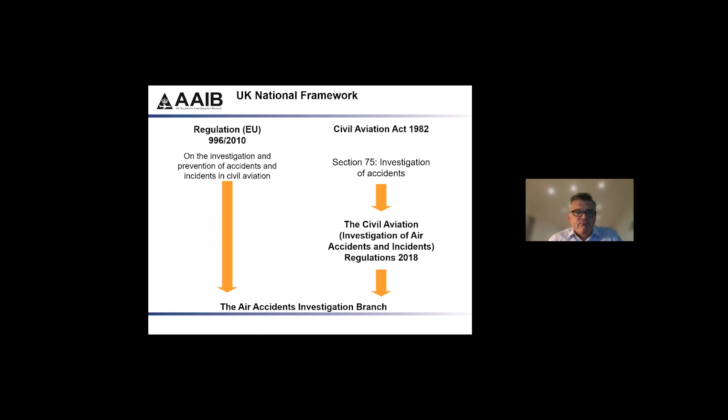Sometime in the future, we may well organise, if you want to come and look around the hangar, you'd be most welcome. But obviously during lockdown, it's all a bit tricky at the moment, but we can talk about that offline. But this is on the outside of Farnborough Airport.

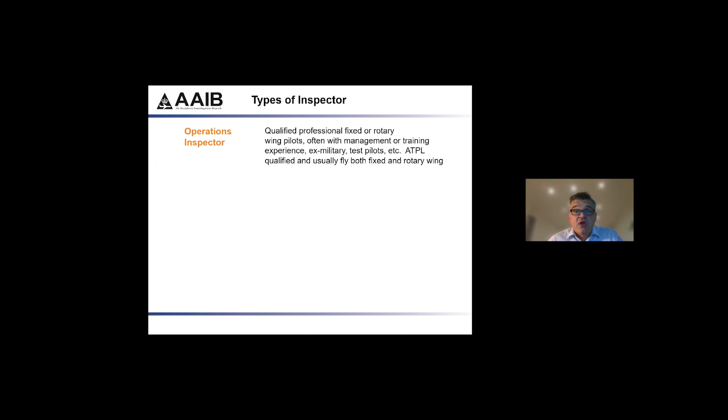Who are we? Well, we've got 4 types of inspectors. We have operations inspectors who are basically pilots. They're all ATPL qualified. Many of them ex-military, but increasingly that's less so now. A good mix of people who fly both fixed wing and rotary wing, and most of them actually fly both. And we actually keep their currency up. So most of our pilots are flying 1-2 days a month for an airline or in the North Sea.

We've got engineering inspectors. That's me. Mostly civil, but a few increasingly coming from the military. All experienced in the aerospace industry. We differ from some countries. We don't take graduates. All our people have typically got 10+ years before they come to the branch. And we also encourage engineering inspectors to undertake and get a private pilot's license.

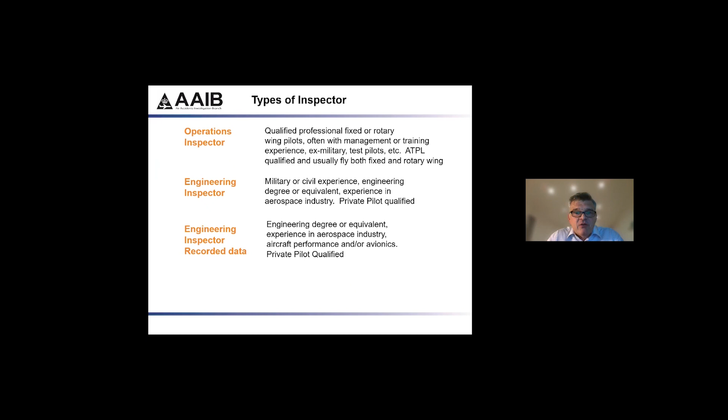We have engineering inspectors who specialise in recorded data. These are our sort of heavy duty techie people, and that's the growth area for us at the moment. Again, very heavy on their avionics and background in data and non-volatile memory. Again, private pilot qualified. And we have currently 1 human factors inspector. We have lots of links into other places for human factors type skills, but psychology, lots of research type background, and specialities like ergonomics in our armoury.

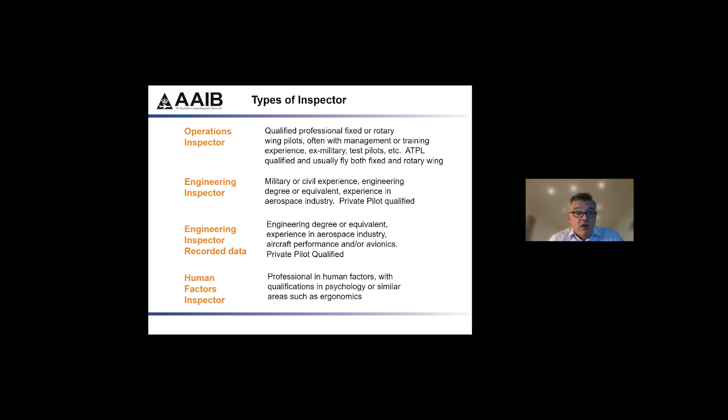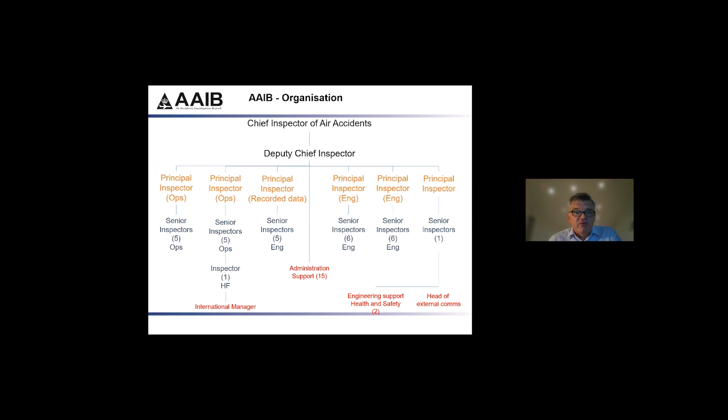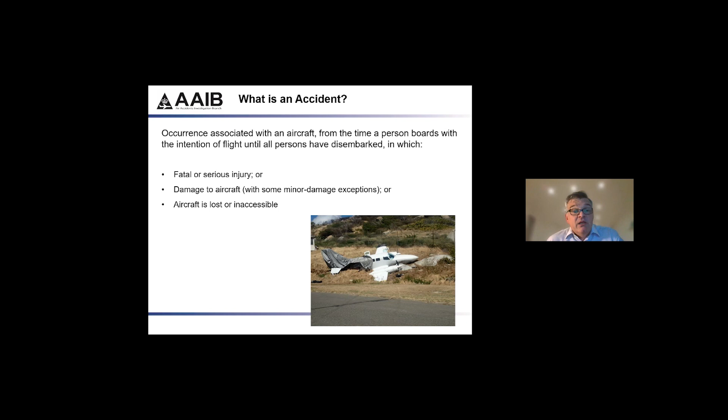There's an intention to fly, and thereafter, you need to have a fatal or a serious injury, some significant damage to the aircraft, so tyres, brakes, propellers don't really count, or the aircraft is lost or inaccessible, which in the case of MH370, for example, which I was heavily involved with a few years ago, the Malaysia Airlines 777, if you haven't found it, that is clearly an accident by Annex 13 ICAO definitions.

We didn't used to, until about the 90s, investigate serious incidents, and actually, fair play to ICAO and the EU, there's an awful lot of safety we have from things that might have been an accident but weren't quite. We very rarely do those for GA aircraft, but for where our main focus is, which is the fare-paying passenger, we're probably doing as many serious incidents as we are accidents in terms of where we can learn some serious lessons, and I'll come back to some current things we're doing on that a bit later.

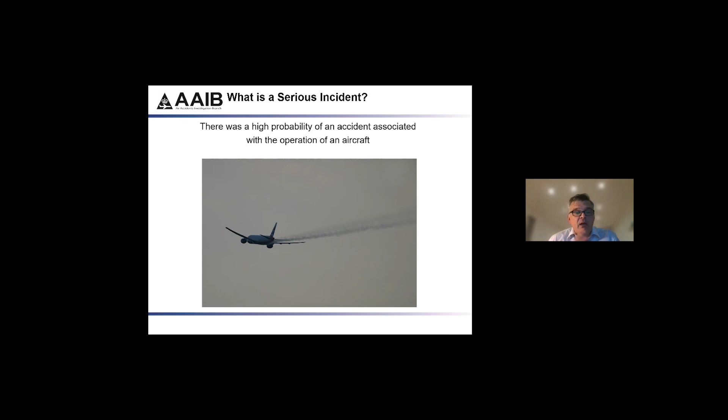So in a typical year, the phone rings about 1,000 times. We deal with a lot of those with no further action, very minor things, and people are just trying to be helpful. And we'd rather people phone us than not phone us. We really like to try and capture as much as possible.

But about 200 times a year, we will deal with a correspondence investigation. That is generally a GA pilot has an accident by the definitions of ICAO, and we will send them a form. We'll do it by correspondence. We call it an AARF, an Aircraft Accident Report Form, and we'll write maybe half a page, maybe 3 pages, and we'll publish those once a month in our bulletin, which is online and still a paper copy and sent to flying clubs around the UK.

About 30 times a year, we will deploy. We'll send 2, 3, 4 plus people to a field. It might be a GA accident, GA fatal accident. That'll be a field deployment. Or if there's a serious incident or an accident to a passenger aircraft, we will deploy a team, and that's a much more significant investigation. It might take 9 months to complete, and again, we'll report that in our monthly bulletin, available online, and with recommendations, etc.

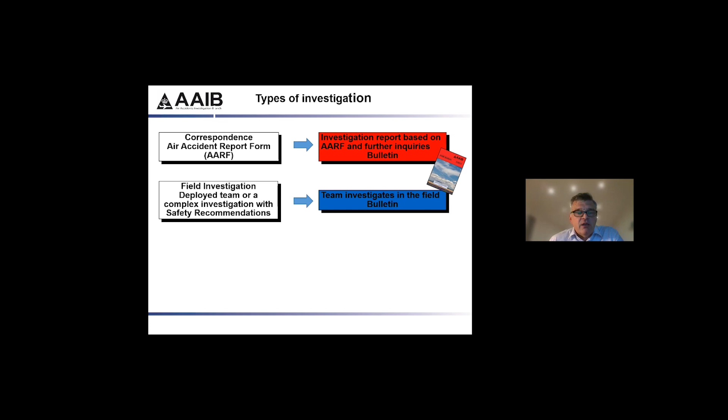Perhaps once, twice, 3 times a year, big investigations, a formal investigation, standalone report, a yellow report. We make those reports available. They take a bit longer, and occasionally as well, if we have an urgent need to do something quickly, like we're deployed somewhere, we want to make a recommendation very urgently, we haven't finished the investigation, we'll use a 2 or 3 page special bulletin to make a recommendation. And again, I mentioned earlier, our currency is recommendations. We make recommendations to improve safety.

In keeping with Annex 13, all our field investigations and our formal reports are sent out for consultation. So anyone, the pilot, next of kin of the pilot if they're sadly deceased, the owner, CAA, EASA, will have an opportunity to comment on the factual content of the report, and that's how we get feedback, make sure we've got all our ducks in a row. That's a confidential draft report, before we come back, submit all the comments, and then publish it in the public domain. So it's very tight secrecy and scrutiny up until that point, and then it's in the public domain, and we try and be very, very open about the safety message.

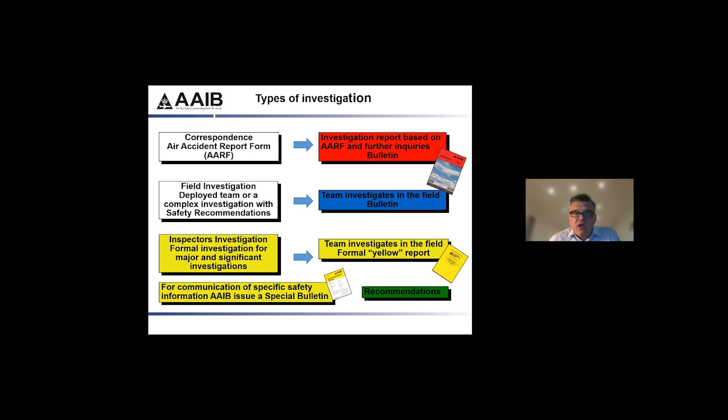Interestingly, both Bermuda and the Cayman Islands have a very significant fleet of aircraft on the registration, typically 600 or 700 aircraft, and very little general aviation. So a lot of the Russian low-cost airlines are registered in Bermuda, and if there's an accident, by virtue of the fact that they are a Bermudan reg, we occasionally, once every couple of years, find ourselves going to a major accident in Russia to support that part of the investigation as part of an international Annex 13 investigation, which has always worked very well, although it can get a bit cold.

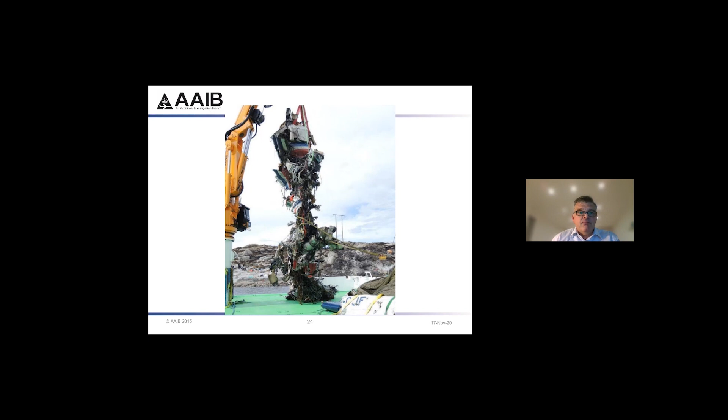Fortunately, the tide in Norway is only about half a metre, so we had a pretty good recovery operation of the bits we wanted, and we knew where they all were. The main rotor head, a bit like a sycamore or a child's toy, just drifted down onto land, pretty much intact. A similar operation, but a lot swifter and cheaper in Norway to recover the wreckage.

Now, this is going to be the difficult bit, so bear with me. There's two engines on this helicopter, both going at about 22,000 revs per minute. It goes through a bevel gear here to change direction. And then there's the bit missing here, and that's the clue: an epicyclic gearbox, which reduces the revs per minute from about 22,000 to about 265 for the main rotor head, and increases the torque.

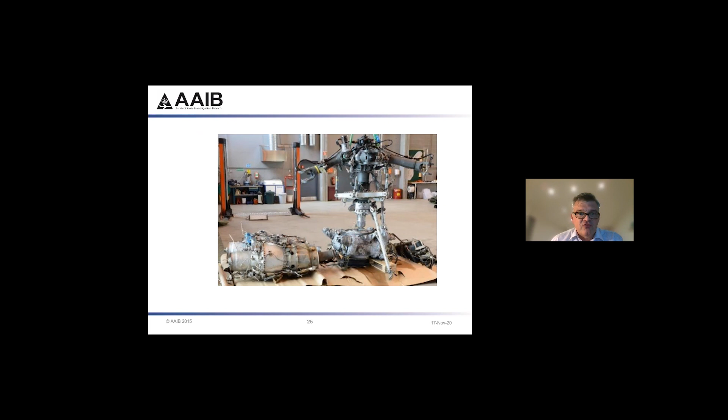The fact it's all missing is a big clue here when we reconstructed it in a hangar in Norway. If we look from below this point here, this is what an epicyclic, or sun and planet, gearbox looks like.

It's got two stages on top of each other. It's like a very big Sturmey Archer bicycle gearbox, if you've ever taken one of those to pieces. And basically, it's got a sun gear, which isn't here at the moment, meshing on, in this case, 8 planet gears, and those also mesh on an outer ring gear, an absolute work of art.

One of the most important parts of the helicopter is the gearbox. This is a particularly clever, beautiful design, very light for what it's doing, and very compact. Each of these gear wheels here looks like this, and each of these gear wheels clearly needs to have a bearing in the middle. And you can see these sort of shiny objects here about the size of my thumbnail.

There are 28 roller bearings inside each of these gear wheels, and they roll on an inner race in the middle and an outer race. They roll on the inside on what is actually almost a spherical, inside of sphere surface inside this cylindrical gear. And this gear is about 7 inches, like a sort of small cake size gear wheel in high spec steel.

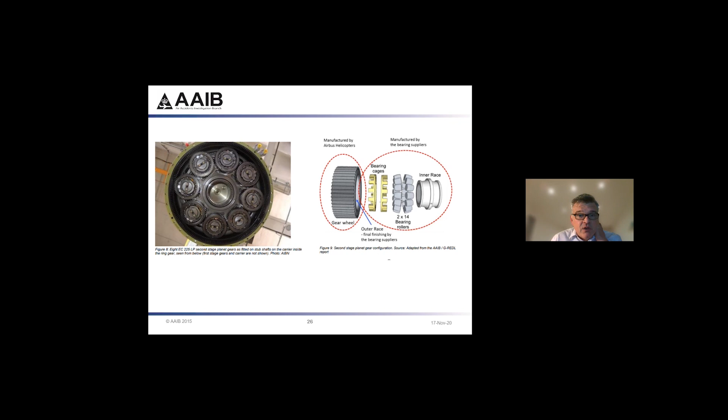Now, we knew from the first accident that this had failed due to fatigue, but we only had one half of it, which was the wrong half of it. We wanted the half of it which actually had the initiation of the fatigue, and we didn't have that. On this Norwegian investigation, if I show the next slide, we had the bit that had the initiation. So after all that wreckage recovery, we're talking of something that's basically smaller than my hand, and that's a quadrant of one of those gear wheels there.

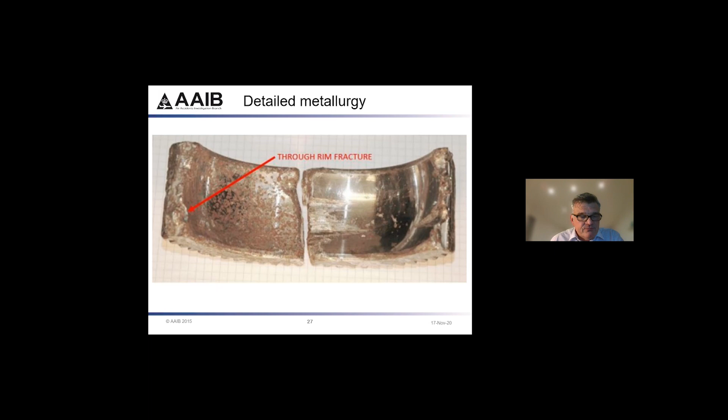And this bit here, this little peanut feature, and I'll show you in a minute, there's some little divots, little spalls coming our way here. And you can see here it's like a sort of spherical internal face, and those roller bearings roll along here and along here in 2 fairly well defined tracks on this smooth surface. If we look at this face here, that's what it looks like.

I spent a lot of time over at the other side of the runway at the labs at QinetiQ, working with the material scientists there. You've got this peanut feature here, which is the start of the failure when it goes through the metal. That's the gear tooth there. You can see the bottom of the gear tooth is here, and this whole fatigue is spread out, causing the whole gear tooth to fail.

Once that fails, the gear wheel opens up, it jams the gearbox, and there's so much energy involved. The support structure cannot support the jamming of the main rotor head. The main rotor head detaches, and that's the impact sequence. So what I'm going to look at here is what caused it to actually fail in the build-up to this, through fracture, through surface, through metal failure.

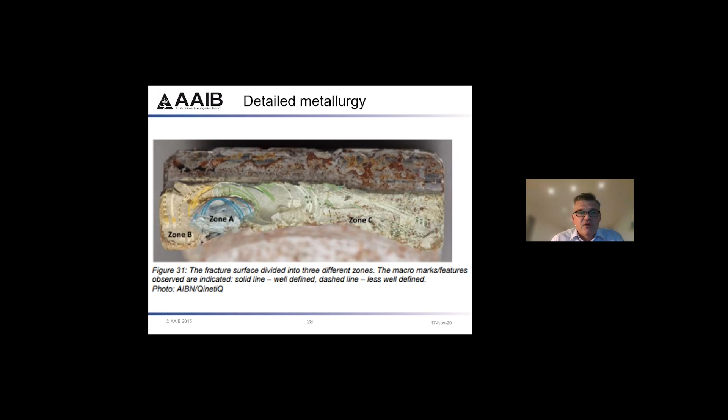And that's the peanut feature. That's the actual fatigue surface we looked at. And this is the line where the bearings actually roll. And this is what we found, with lots of cleaning up and very, very painstaking work to remove debris and corrosion from even just a few hours in the sea.

We find these little spalls, spall 1, spall 2, spall 3, they're 2 or 3 millimetre wide divots that have opened up and generated material. Now, normally with these sort of failures, you get material being generated like spalls, it's fairly natural. You detect it with a mag plug and it tells you something's wrong and you pull the gearbox. But in this case, they had 3 tiny little bits that didn't show up on a mag plug, might have even failed on that flight. And this is an enlarged version of it, you can see them here.

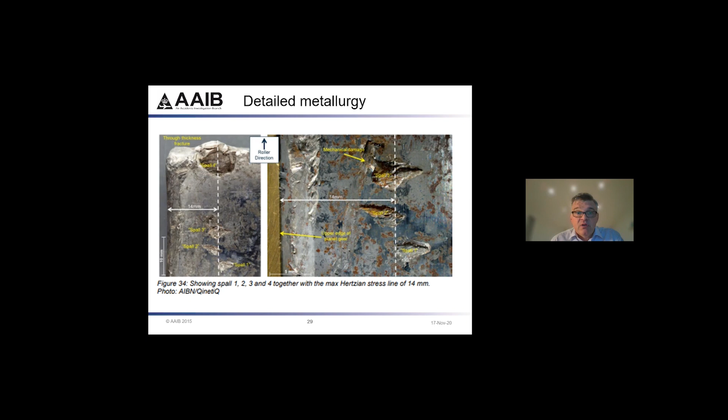And if I take a section through here, we then did some fantastic work with QinetiQ and Southampton University to do an X-ray. And that's that peanut feature I talked about. This is one of the spalls, the big spall, that's a little spall. And what we could see from here is all sorts of tiny cracks underneath the surface where the rolling contact fatigue was doing its stuff and causing the spalling. Lots of things were generating, but this hadn't actually pulled away yet. This bit had, but on this occasion, the fatigue went all the way through the surface and caused a failure.

So that was probably about a year's worth of metallurgy, several hundreds of thousands of pounds worth of work, lots of painstaking work in the lab, and the fleet of this helicopter was grounded in the North Sea for, I think it was about 9 months in the end. So a lot of pressure. We want our helicopters back.

A lot of legal work in the background. People saying, we want access to this. Our helicopters don't work. Lots of legal cases in the background. So the pressure was really on in that case, and that was very rewarding, very challenging, but also quite a testing investigation.

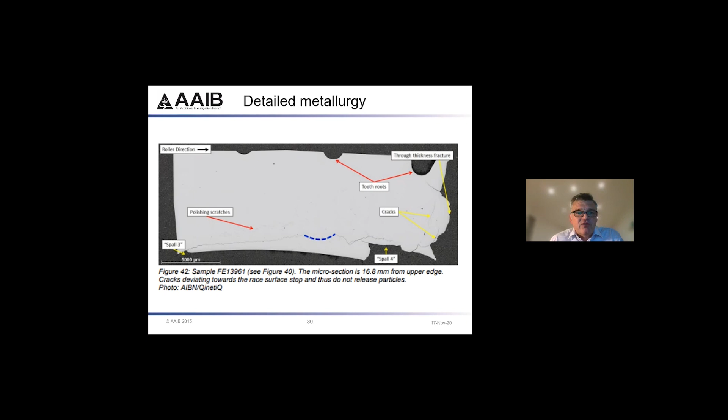I also was made aware very early on that England football were playing against Trinidad and Tobago in the World Cup in Germany that day, and there were about 4 or 5 aircraft desperate to take off full of England supporters. We want our airport back. No pressure there.

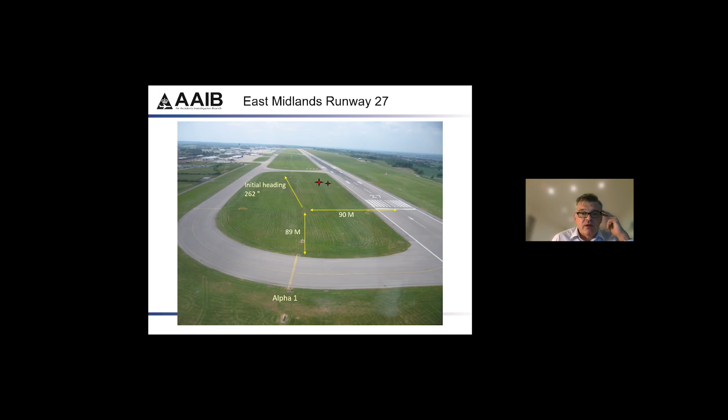And then as the morning evolved, we realised it had been very, very foggy overnight. This aircraft had been inbound to East Midlands, and as the fog was clearing at about the time I arrived at Birmingham, we got reports of a Ryanair flight about to take off, saying I can see a gear leg to the side of the runway in the sterile area. What's going on? And as it turned out, this 737 had actually tried to land at East Midlands, which is a massive freight terminal, in the early hours, and it had missed the centre line by about 90 metres.

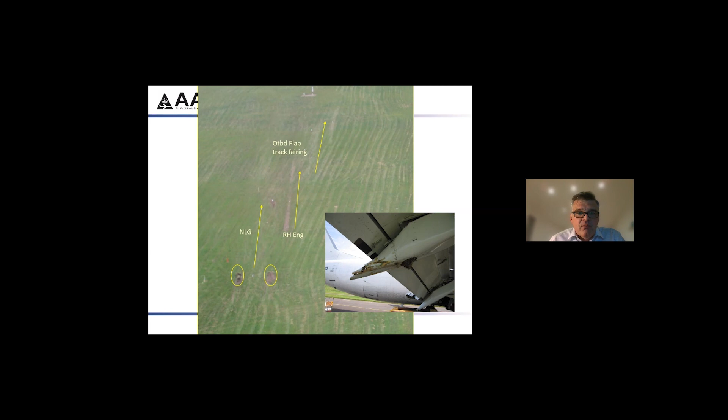Sorry, wrong way. And these are the ground marks. We've got these marks by the main gear, the nose gear, then the nacelle, the outboard flap track, which you can match up the marks here. So I was basically matching up my damage on the aircraft with the damage that my colleague was working on at East Midlands, and then the right wingtip.

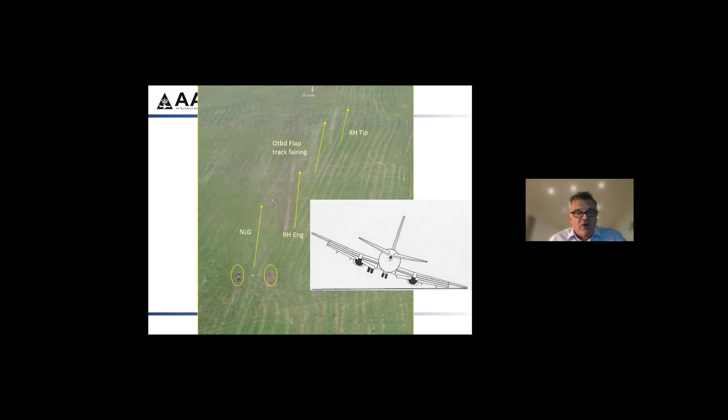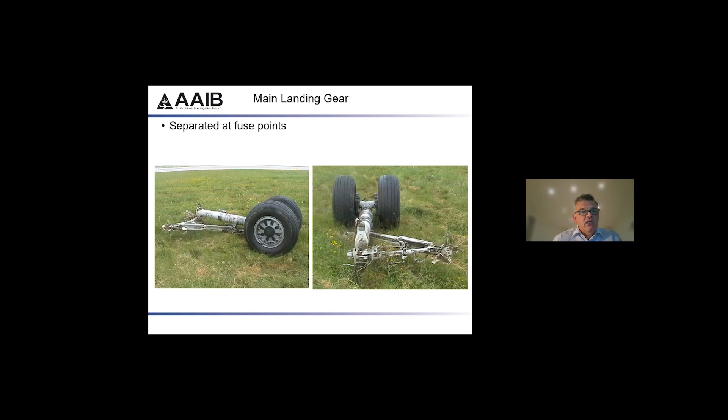So this is probably the closest we've come to a fixed wing commercial air transport accident in the time I've been there. Very lucky to be alive, very lucky not to cartwheel down the runway. And there's the right main gear leg assembly as found.

So what had happened? If I can boil down a lot of work from my pilot colleagues, this was very much a limitation of human performance, a human factors type investigation. Very late on in this Cat 3 approach in the fog, they received an inappropriate RT message just about company business. They didn't want to hear this. They were really concentrating hard.

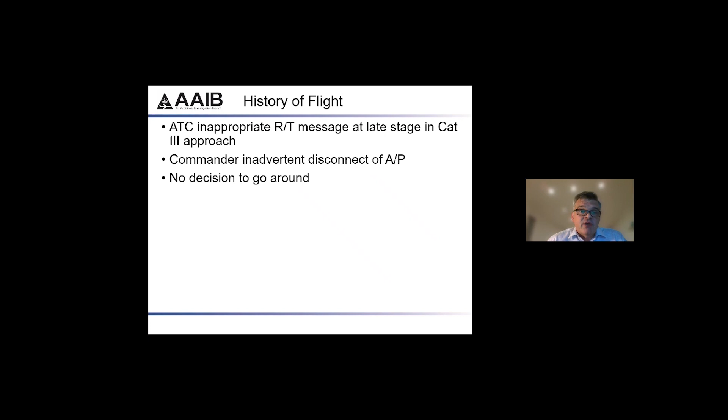They were working hard, and as a result of that message, the commander inadvertently disconnected the autopilot, and that's the real crux of this. They didn't decide to go around. They lost situational awareness, and we identified several issues for training, primarily around the lack of a go-around call, which was basically the main issue here.

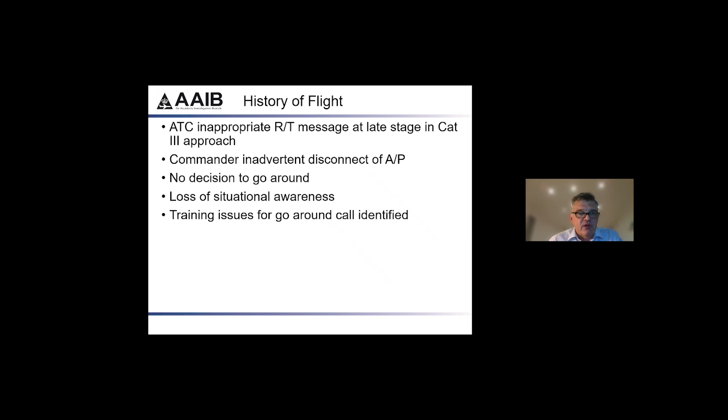Now, in this case, fair play to Boeing. They have a design philosophy of structural fuses, weak points where the landing gear attaches, so where there are excessive loads, well above any heavy landing loads, the gear will just detach and break away, which it did. They lost some hydraulics, but most importantly the wing fuel tanks weren't ruptured, and the aircraft was able to fly relatively normally, albeit with a slightly damaged and fixed flap configuration.

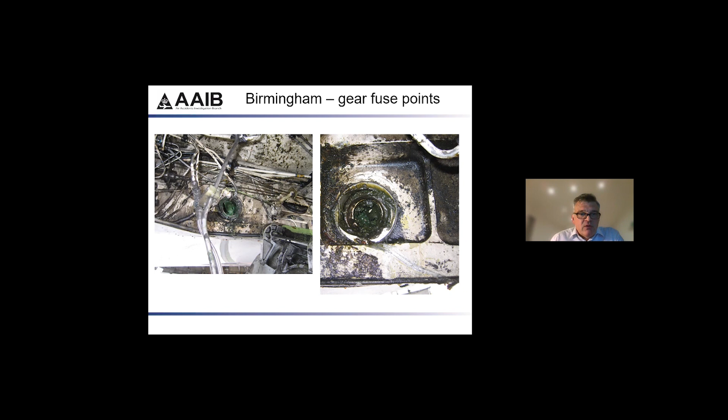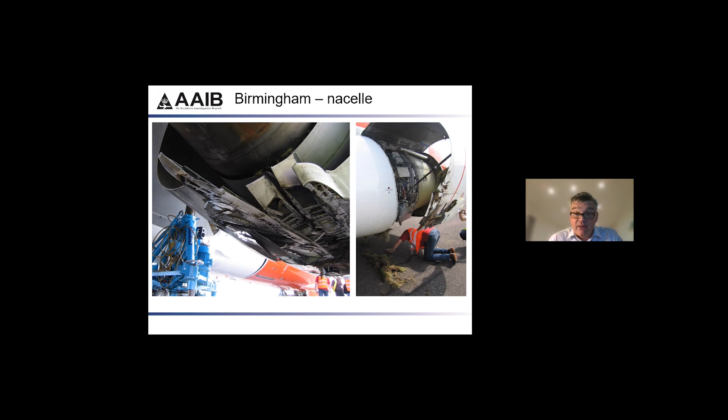And they also got the same sort of fuses on nacelles, which were intact in this case, but I'm fairly confident that they would have done their job if they had been asked to do so. So, I did quite a lot of work on the actual structural integrity of that, and just an interesting photograph really. That's the bottom of the nacelle with all the damage, and that's what 1 kilometre at 130 odd knots looks like to the bottom of the nacelle, and that's the grass that had come from Birmingham.

We get quite involved with the recovery side of things. I'll just go through these fairly quickly, but if someone's got a blocked airport and they're losing money, suddenly all sorts of things appear very, very quickly to help. I wasn't too fussed about the airport being closed, but we were able to put sandbags in the front to prop it up, get the balance right, and we had a tractor tailing.

We had a flatbed under the nacelle on one side, and a tractor put on the side, and we were able to move it to an appropriate part of the runway in the early afternoon. So I think Birmingham were fairly happy with the result at the end of the day.

So to finish, I've got a few slides on recent trends at AAIB, and certainly one trend I have to mention is recorded data. So historically, our group was called the Flight Data Recorder Group, and they're now the Recorded Data Group, because there's so much information out there in all sorts of formats, not just black boxes. We've got mobile phones, we've got iPads, all sorts of apps that pilots use, radar, and huge amounts of CCTV. There's just so much stuff out there. We've got cockpit cameras now.

So many actual avionics boxes have non-volatile memory, and often it's more comprehensive than the actual data recorders. Typical data recorders now, we're looking at about 3,000 parameters, 8 times a second, huge amounts of data. Some aircraft have 2, one at the front and the back, and duplicated data. And even the acquisition units can have more information than the actual data recorder itself. Go back 20, 30 years, and we still see occasionally older aircraft, some of them have like 8 parameters, not solid state, mag tape, all sorts of things.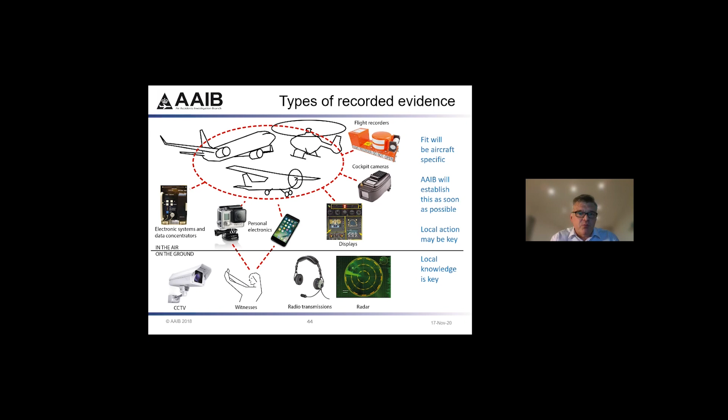So huge advantages there, and for our guys, that's a huge growth area for us. And fusing the data from a flight data recorder and a cockpit camera or a GoPro is what they get up to these days. I'll show you a few CCTV photographs here. They're getting much better, rather than the Learjet I showed earlier that had about 4 snapshots about 5 or 6 seconds apart, very poor. Here, you know, we can get all sorts of information about an impact sequence from that sort of CCTV.

And increasingly with air shows and aerobatics events, we get really high resolution CCTV. Like for example here, I won't go into too much detail, but we can really get so much information about what happened in an impact sequence or in the build-up to an impact sequence from CCTV.

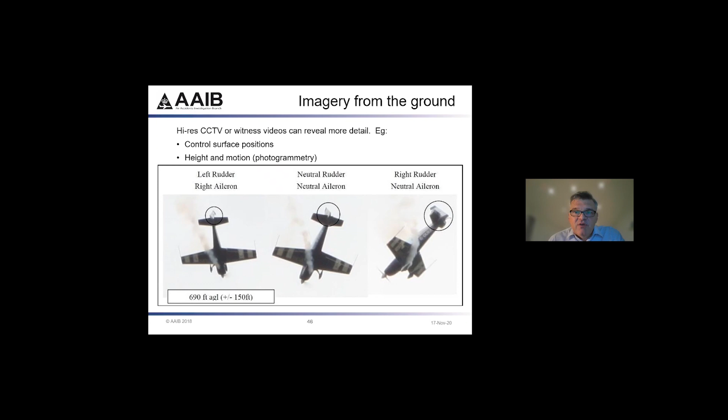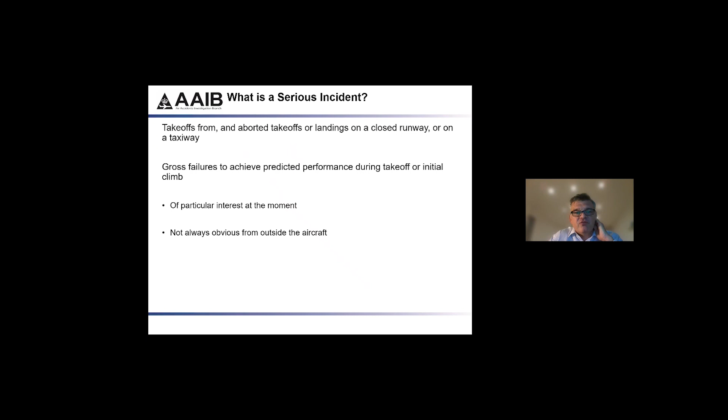On this occasion in Belfast, a 737, people going off on holiday to Greece. They had a late nose wheel change, and during the wait, the crew decided to reprogram the electronic flight bag to derate the takeoff to preserve engine life. And so rather than entering 16 degrees, which was the OAT at the time, they put in minus 52 degrees, which was the forecast temperature in cruise.

And that resulted in what was a moderate derate suddenly being an aircraft that was taking off with only 60% of the thrust available. So it took the whole runway to take off, took out a runway light, and at about 4 kilometers from the end of the runway, they were only at a few hundred feet when they realized they needed to press the TOGA button and full thrust, and away they go. So we actually made it a formal report.

30, 40 years ago, there wouldn't have been a formal report for us, but there's huge amounts of safety in there, looking into the psychology behind programming, the interface with the actual electronic flight bag and with the computer involved, and the software refreshes of that.

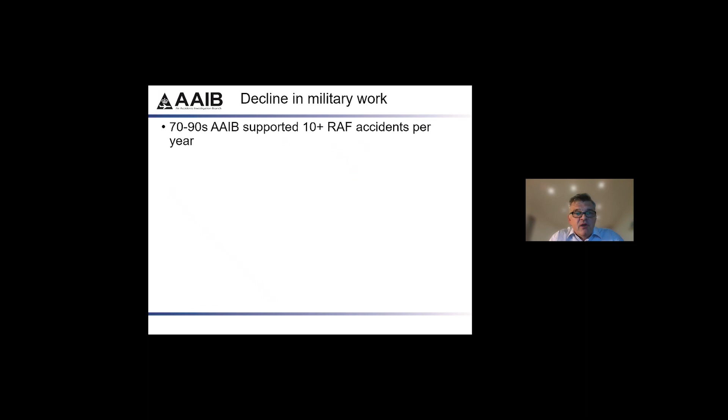Back in the 70s and 80s, and even in my time in the early noughties, we were doing a lot of work to support RAF accidents, probably 5 or 6 in the noughties, and certainly in the 70s to 80s to 90s, 10 plus accidents a year for the RAF. They didn't have an investigation branch per se, and we'd always get involved to go and help them with their work. And they were fascinating cases to look at.

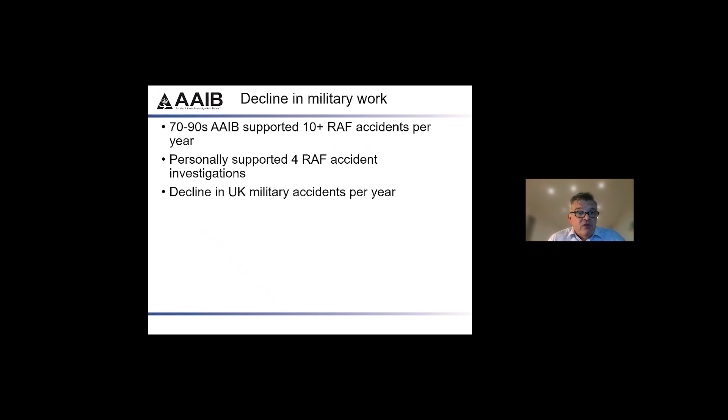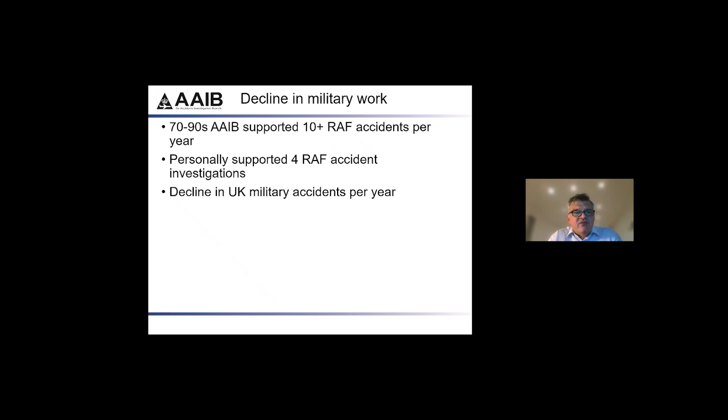As I said there, I've been involved in 4 in the early noughties, but now with the Haddon Cave report after the 2006 Nimrod accident, the Haddon Cave report of 2009, they set up the MIL AAIB for aviation, and that subsequently has morphed into Defence AIB to look at all sorts of defence accidents for marine, land vehicles, etc.

And they were the MIL AAIB, and a large chunk of the DAIB were co-located with us at Farnborough for many years, and they've now moved on to a bigger headquarters at Boscombe, where they're set up, and we still do some work with them. We invite them to some of our deployments for training, but they've just outgrown their link with us, which was kind of the plan, I guess.

But in terms of our side of things, they've got a dedicated team. We're not deploying to military work anymore. Only very minor stuff, but it's almost nothing really.

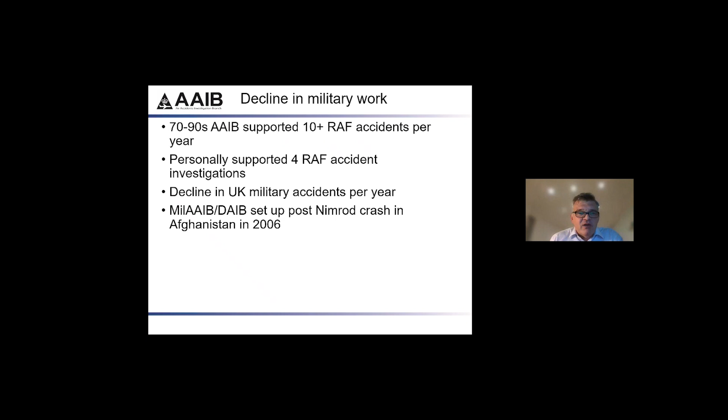And my final issue is UAVs or drones or UASs. Now, this actually is a UAS, an unmanned air system. It looks like there's a person in it. It's actually an Alauda Airspeeder, an accident that happened in 2019, and they made a mock-up of what would be a manned vehicle, but made it unmanned to demonstrate it. I think it's a 2/3 or 3/4 size model of it, but it demonstrates very well the issues that we're seeing with a lot of UASs that are emerging.

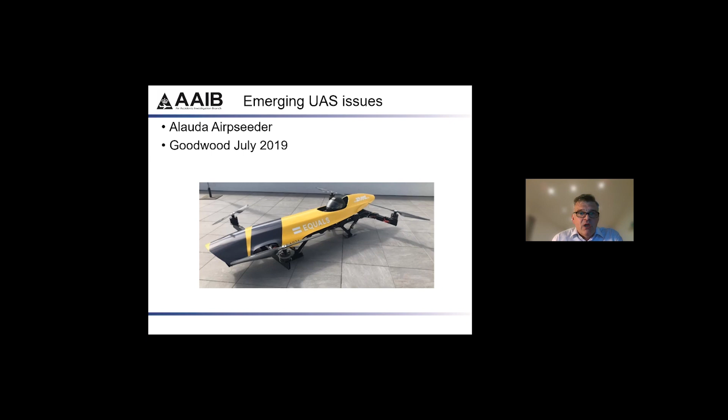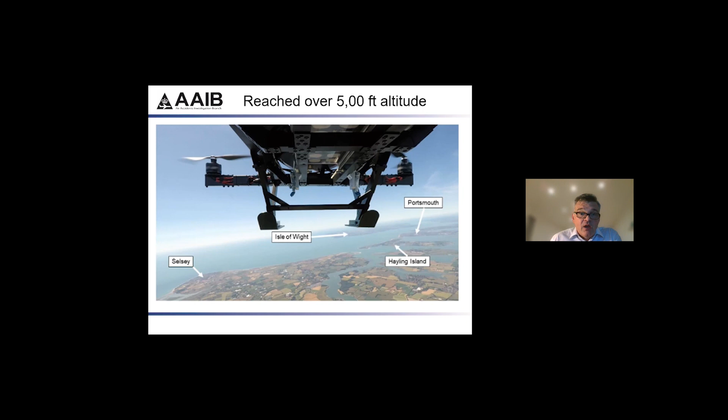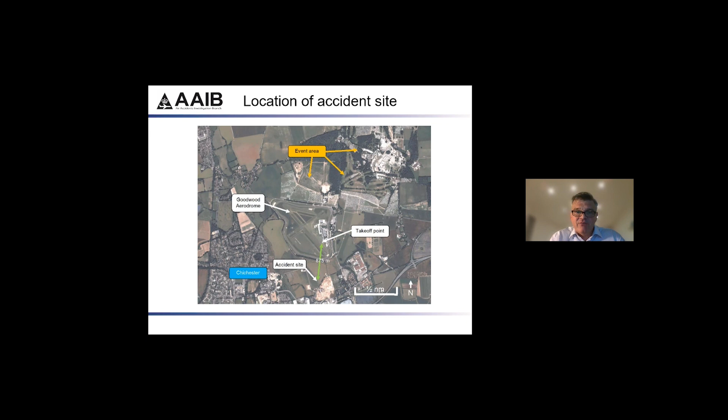A lot of people were at the festival. Luckily, it went in the right direction, away from the crowd line, but it was quite close to a housing estate. Quite a few issues. Now, this report's actually out at consultation now, so I can't give you too much of the flavour because we haven't actually fully agreed the report.

Needless to say the kill switch did not work, and there's an awful lot of work we're doing, and we're engaging very heavily with the CAA in the UK about some of the design issues and what are the standards for designing and building UASs, because they're just not the same standard in many areas as passenger transport aircraft as we know it.

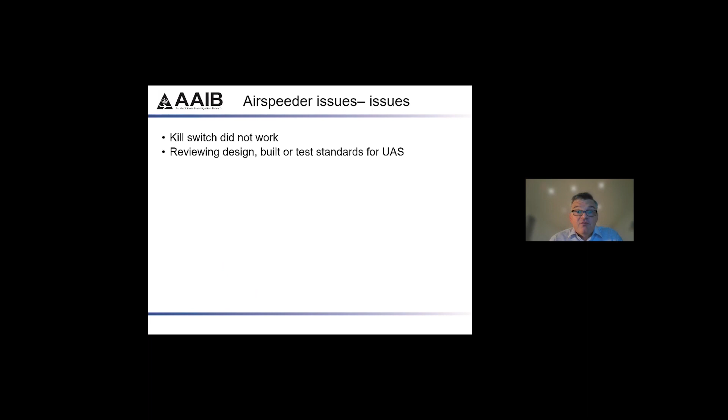So that is it. And David, any questions you would like to ask? John, that was absolutely fascinating. Thank you very much. Can I start the ball rolling? I guess that most of your recommendations centre around engineering requiring re-engineering, and perhaps processes and procedures requiring retraining. Are all your recommendations taken up?

Historically, we made a recommendation, and if you look back at some of our recommendations from 30 years ago, we just didn't monitor them, and now we are obliged to monitor and we assess them. So we make a recommendation. The addressee has 90 days and they're obliged to reply, and certainly within Europe they are obliged to do that under law.

And then we have 60 days to assess the intent of their response, and we also have further monitoring activities, saying we'll assess them as partially adequate, still open, and we may ask for an update in 6 months or a year's time, or that sort of thing. So we've got no power to enforce them. And we're very careful, when we make recommendations, that we don't solutionize.

We don't say design it this way. We say review the design to ensure that this doesn't occur. So we don't solutionize, and it's obviously normally the job of the CAA or the EASA to enforce that downstream. And normally, even if, let's say, it was an Airbus or a Boeing product that we had an issue with and thought could be better, we would generally say it is recommended that EASA or the FAA review this in conjunction with them, to actually give some clout to it as well.